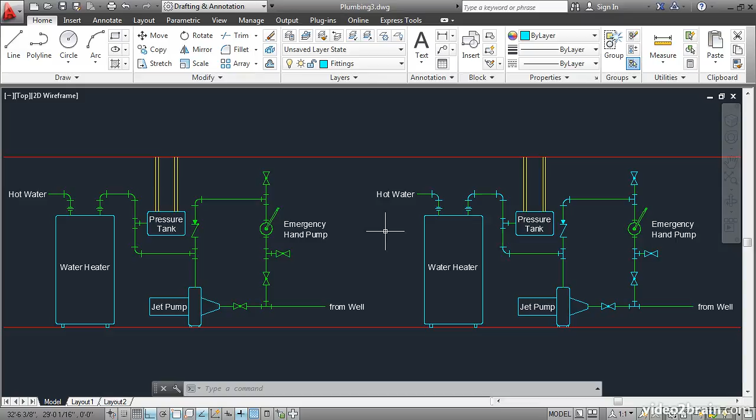In this video, you will insert, explode, alter geometry, and redefine a block definition. Then you will learn how to edit blocks in place so that you can save time performing these same steps. Open the Plumbing 3 project file.

I'd like to change this emergency hand pump block so that it appears cyan like all the other plumbing fittings. Select the block reference and look at the Properties panel. It says the color is set by layer, and the layer that it's on is cyan. So, what's wrong? You might assume that it should appear in cyan.

What's actually happening is the objects inside the block definition were on the plumbing layer, which is green. So they're not inheriting the properties of the layer that the block reference is on. To solve this problem, what we need to do is insert another copy of the hand pump off to the side someplace, explode it, change the objects to layer 0, and then redefine the block.

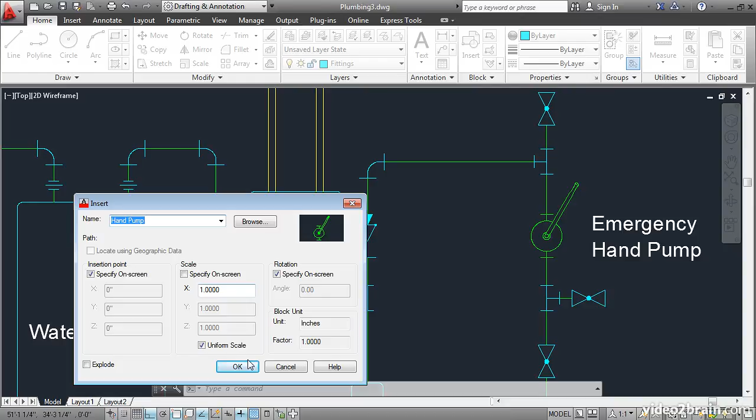I'll press Escape, and then insert the hand pump. OK. I'll click a point over here someplace, and click again to insert the rotation angle. Then I'll explode this block, turning it into its constituent pieces. Then select all the pieces and change their layer assignment to 0. Layer 0 is the only layer that lets geometry inherit the properties that the block reference goes on to.

Next, create a new block definition up here. And if you want to redefine an existing block, you have to use exactly the same name. So let's select that here from the list. Hand pump. I need to specify the base point, and this should be in the same place as it was before. It's right here at the base. We also need to reselect the objects.

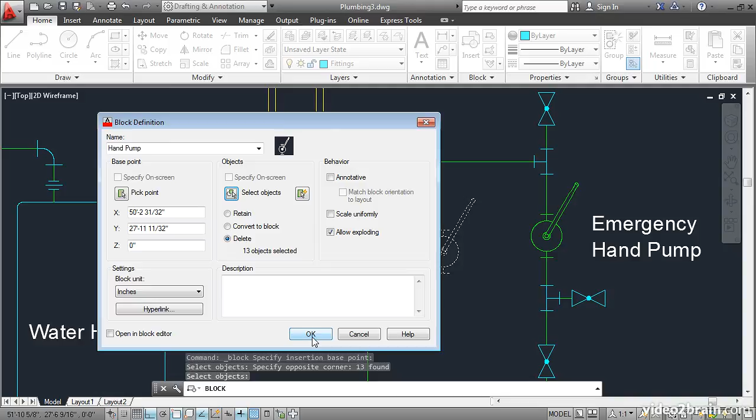And then click OK. It says hand pump is already defined as a block in this drawing. Would you like to redefine this block reference? Yes, we do. Click Redefine Block. There we go, mission accomplished.

Now there's actually a quicker way to do this sort of thing. It's called editing a block in place. For example, let's say we want to change the way that this T looks. I don't like the way that these lines stick out so far from the piping. What if I brought that in and made those lines a little smaller?

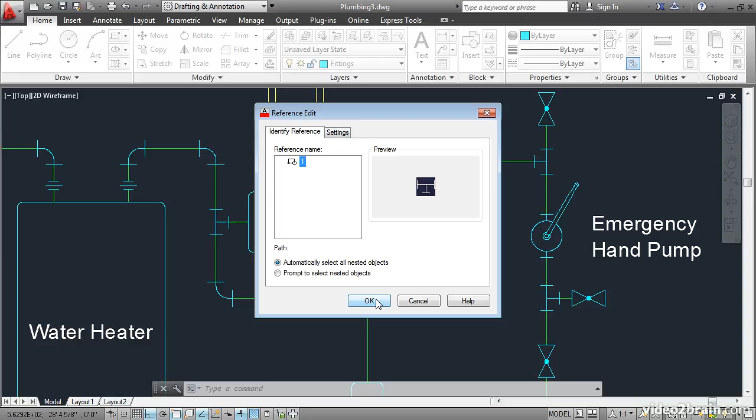I'll select this existing block reference, right-click, and choose Edit Block in Place from the context menu. Then click OK here in the Reference Edit dialog box to indicate that you want to edit this T block. Notice that everything else gets dimmer so that you can focus on working on this geometry within the block definition.

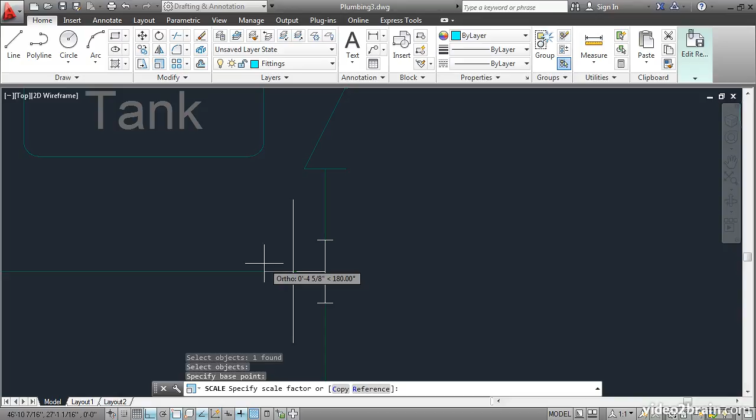I'll zoom in and then use the Scale command. Scale this line down from this endpoint. I'll type a scale factor of 0.5, enter, so it gets to be half as big as it was originally. And then I'll do the same here on this line, 0.5, and once more on this line, 0.5. Now I'm done.

I have to come over here and choose Save Changes. Click OK. And all the T blocks have been automatically updated with the change. You learned both how to redefine a block by name and how to edit a block in place. Now you know 2 methods for altering blocks so that you can control many block references from a few block definitions.